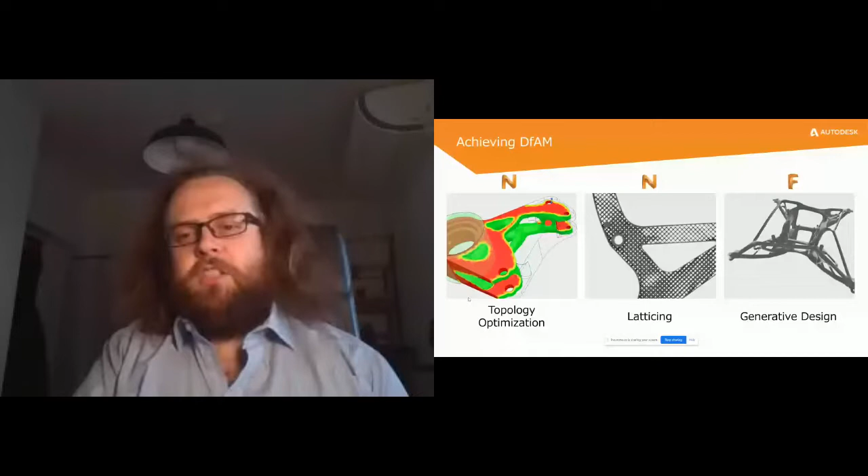How are companies achieving that? Again, from a software and design perspective, you can start from scratch and completely redesign the part, which is a great way to do it. If you're looking at optimizing an existing part, there is topology optimization and latticing. And if you are looking at creating from scratch a new design based on the requirements of that part, looking at generative design is a great way to do that.

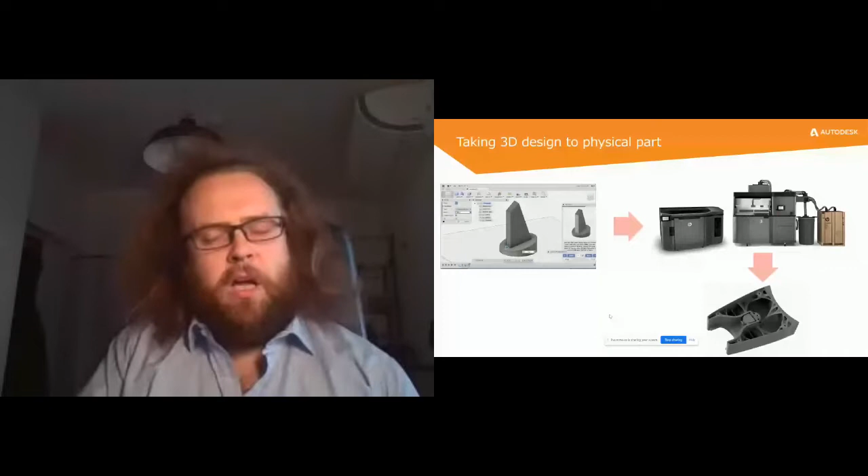In terms of looking at the speed and cost and the repeatability, this is where we're going to have the key focus of the presentation. So I want to jump directly into that. So if we have a look at some of the designs that are going into the parts, people generally think of additive as, I've got the design, I'm going to send it to the machine, and it's going to come out as a functional part as is. If you have used a machine before, if you understand the workflows, you know that it's not that simple. There is a lot of conversion. If you're working with existing STLs, you're going to have to be doing a lot of repair to them.

There's going to be wall thickness checks. There's going to be checking if there's any internal volumes where trapped powder or resin could be, looking at packing to get the optimized ROI out of the machines, looking then further at packing, make sure that the parts are going to be evenly dispersed so that they're not influencing each other.

For example, for an SLS or an HP machine, you'd also be looking at layer densities, and then you'd export to machine. You may have noticed that some of the images in here are using HP logos and using HP machines. That will be quite a large aspect of the presentation, but there is also going to be some examples of how automation can be good for metal as well later on in the presentation.

So if we have a look at what Netfabb does, just so that we can have a base understanding of what the capabilities are here, Netfabb is a workflow processor for taking the CAD to machine. So it's the bridging tool there that will do everything from importing native CAD formats to STLs to 3MF, including slice files. It's going to then allow you to optimize the parts. If you do want to be doing topology optimization or latticing, you can then do further repair of the part.

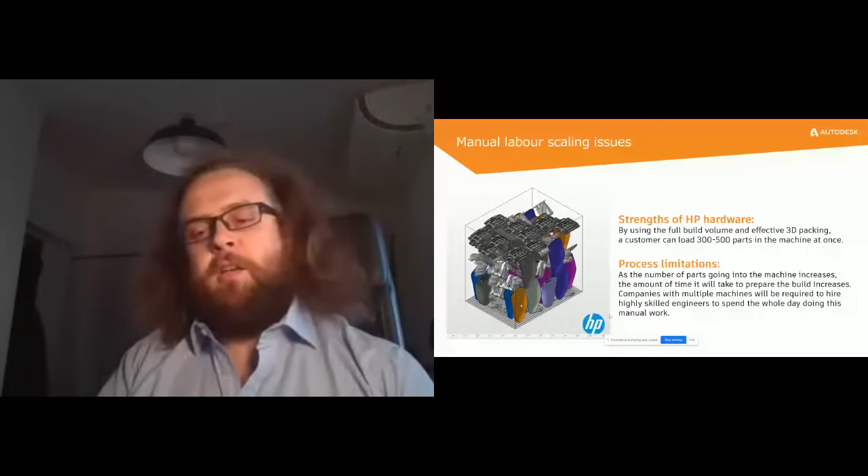But again, because of this process, it means that there is a lot more time in preparing the data. So while the machine can handle a huge range of variety, for the person that's engineering these parts and the person that's then going to be processing these parts to get them ready for the machine, it's going to be a very long process for that person to actually create the pack to go into that machine.

So some of the hurdles that we're seeing for different companies is companies that are looking at doing mass production. They're looking for repeatability, cost, and scale. So again, looking at repeatability, they want to know that the part that they created and tested in one machine is going to come out the same in different machines. They don't want to have a variety of different results coming out of the machines because that would reduce the ability for that part to scale.

If we have a look at some of the costs, again, they want to make sure that the costs that are going into the part are reduced as much as possible to make additive a suitable manufacturing technology for that part, and then hopefully to extend that out to other areas within the business so that they can leverage the technology across other functions within that company.

And then, of course, looking at scale. So if they want to be implementing this on a global standard, for example, like what we heard from Flex, they've got various different facilities across the world. And if they want to have a standardized process, then they definitely need to have a process that is leverageable within each of the different facilities. So that includes making sure that you have a very systematic approach to the way that you're applying different methodologies to the build.

And that is something that's really only going to be achievable if it is not based on individual siloed people. So you can't have the exact same person until we figure out cloning, until we understand the way that that person is working on each of the parts. So if we can have a very logical approach to the way that the parts are prepared, standardize that, and then have that scaled across all of the facilities, then we start to see a real expansion of the additive ability to scale across those different parts as well as regions.

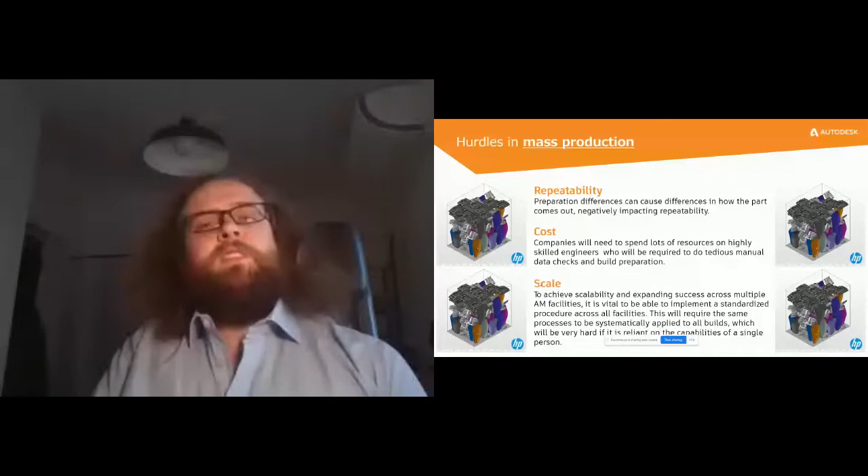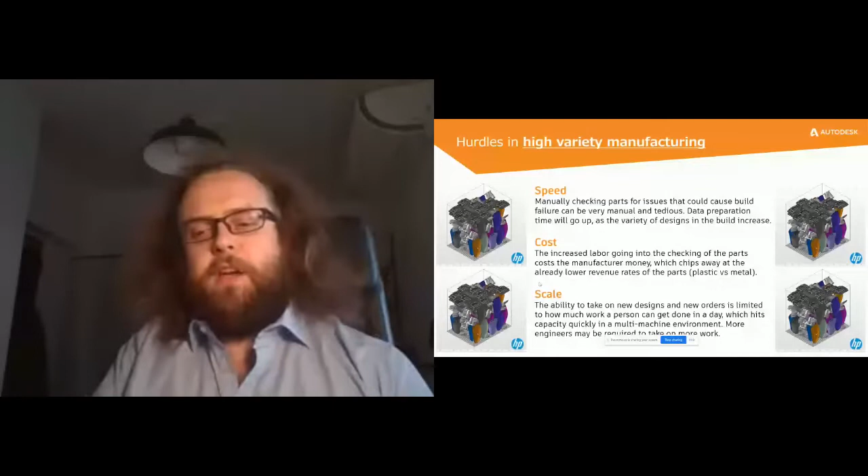So when we are looking at the way that automation can assist with these things, the way that I like to think about it is looking at how you can apply the know-how and best practices, put it into a script, and make it a repeatable process for all of the different machines that you're running across the business. So some of the things that we could look at as a workflow example would be importing an entire folder of parts, doing wall thickness checks, and then saving the parts whether they fail or pass the criteria that you've set up within the wall thickness check,

and then passing on those print files to a 3D packer, which will then prepare that module for you so that you don't really have to do much manual work, especially considering a lot of these processes are very, very tedious. They're doing the same thing multiple times, so it can be a bit of a bore for the engineers that have to do them. So very quickly, just to have a look at a video that's doing this.

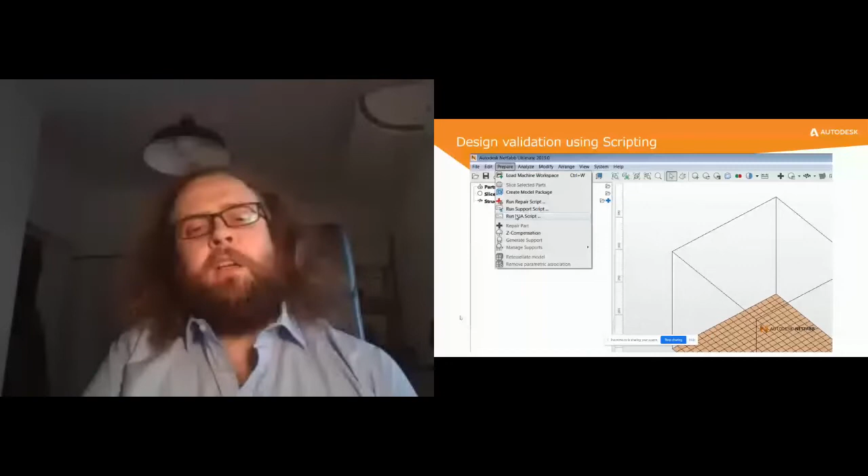So what we're going to be using is the Lua scripting language. So Lua scripting is what we're going to be running here. We're going to be setting it up as a script that's going to be bringing in parts, checking the wall thickness, and separating. So it's going to filter it so that the engineer knows which parts to look at, and this is going to really help them be as optimal with their time.

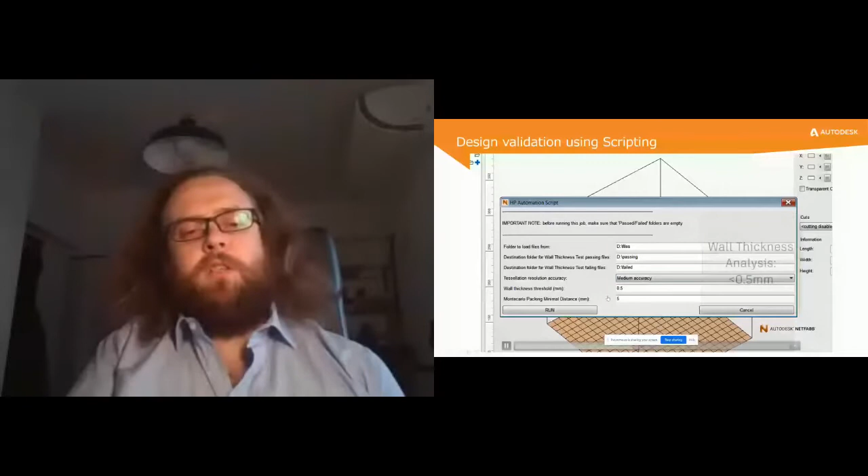So it's a fully customizable script, as you can see there. We've got a pop-up window which can also be customized for separating the parts, doing a tessellation. We've got the wall thickness threshold, and then what we can do is bring all of the parts from that individual folder. So we're going to remove all the parts that are in the failed and pass folders. And then from the files folder, there is one part within this that is going to be causing issues.

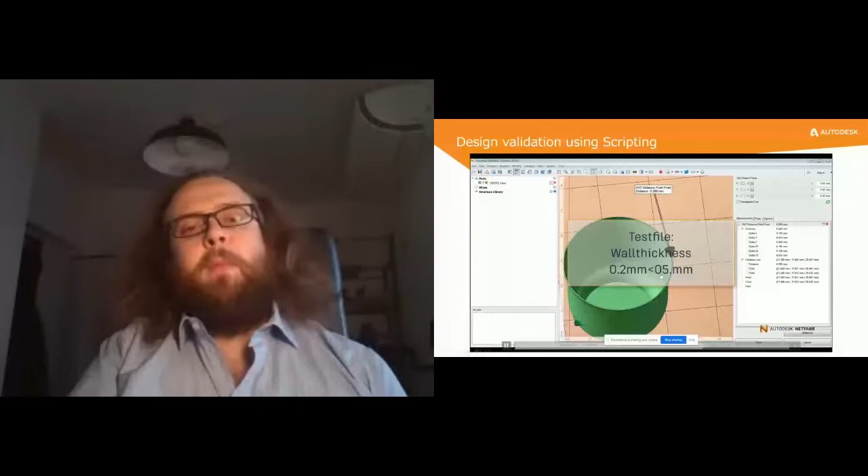As you can see here, we have some parts that are STLs, some that are 3MF formats. We also have some native CAD formats. So it's going to bring in a huge range of different parts into that one build. What it's going to do then is check to see if 0.5 mm is being met. As you can see, this part is 0.2, so it's not going to be meeting the criteria.

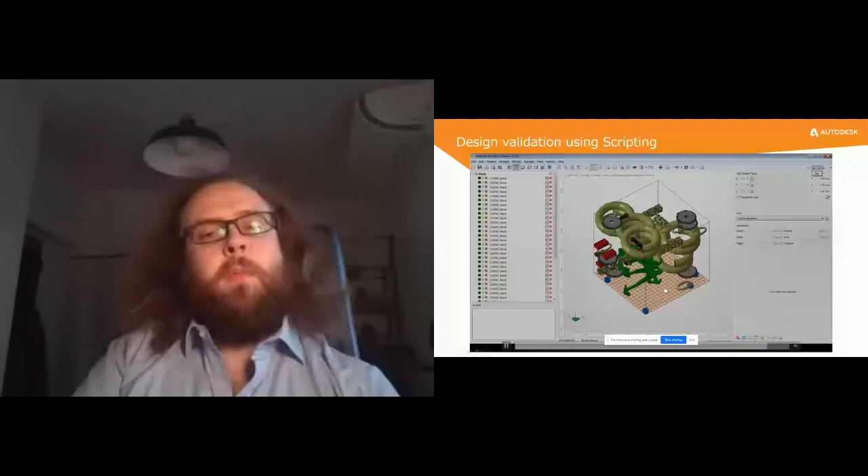When we run this script, it's going to upload all of those parts into the Netfabb environment. It's going to be doing a thickness check. And as you can see, the part that was going to be failing as expected is filtered. So instead of having to check all of these different meshes, I think it was close to 100 parts here, the engineer only needs to look at one part, which really makes them efficient with their workflows.

But when we are having a look at this kind of thing, it is a great tool, and having a look at the Lua scripting is a great capability. You can edit these sort of things here when you are building out that capability and when you do want that flexibility of editing on the flow.

So once you understand that workflow and once you have these parameters set up, what you can then do is set these as presets so that this screen doesn't even come up at all, and it's just going to run that script on all of the parts that you are looking at doing. However, one of the things that we do find is that you do need to go into the software, click Run Script, and then click that script.

Again, it's not a massive amount of work compared to what people would be traditionally doing, but it is one thing that if you were looking at having a 24/7 backend server running where it's going and doing this on an as-need basis, for example, someone loads a bit of data up onto your server, this is going to be a pain because you do need to have that manual intervention.

So what we're looking at doing is we have a very open platform, which we have uploaded to GitHub, so you can actually see all of the information. It's very open. You can adjust it, you can edit it, you can do what you want with it when implementing. It's called Netfabb Application Server. And what it is, it's a RESTful API that is going to connect your service to Netfabb.

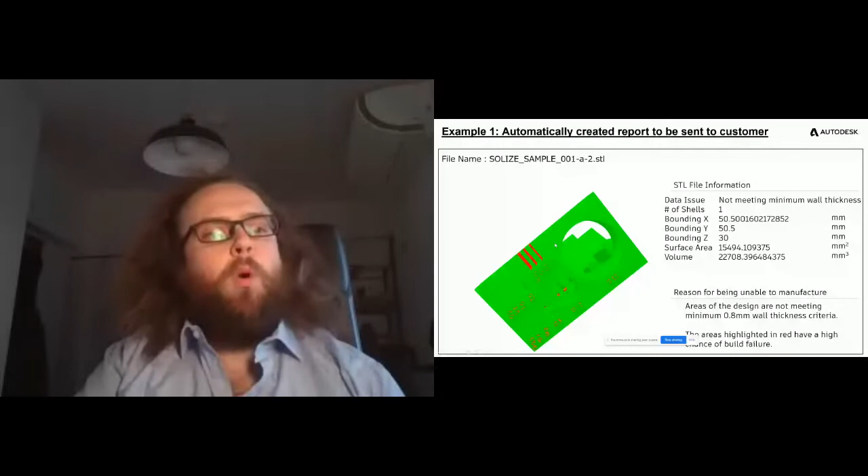So one of our customers in Japan has actually implemented this very effectively. This is an automated report that is created through the scripting for Netfabb. And what this is looking at doing is it's pulling in the STL that a customer has uploaded. It's looking at the individual areas within this part, critiquing it. It's checking, for example, in this case, they've got a minimum wall thickness criteria of 0.8 mm.

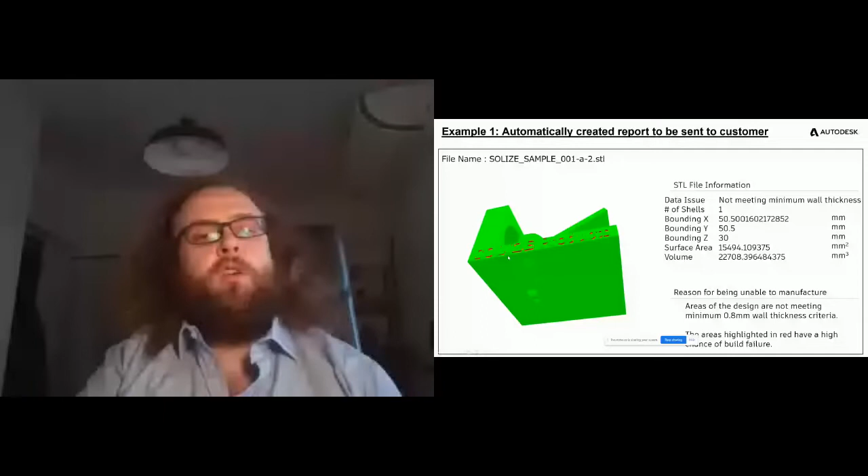And as you can see, it's actually automatically created this, which is a 3MF file format. It has highlighted all of the areas that are not meeting the criteria of 0.8 mm minimum wall thickness, and it has applied a red surface to each of the areas that has issues. What it can then do is it's also pulling all of the information about that STL.

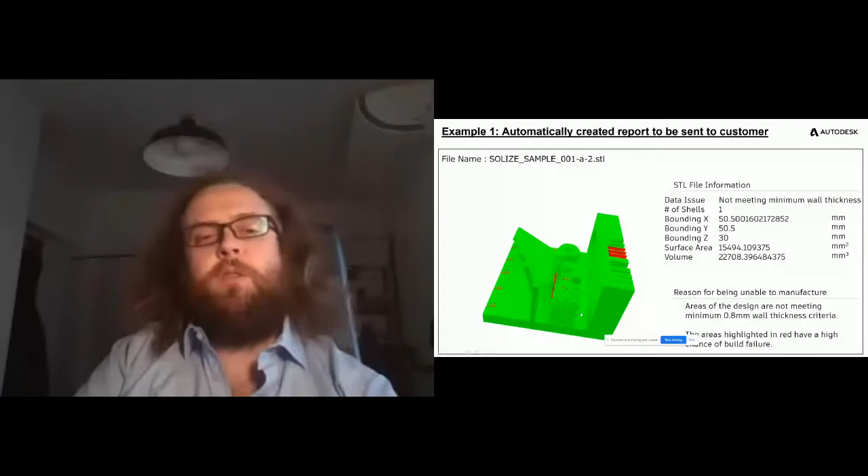It has all of the information that can then be sent back to the customer, and it's saying, is this going to be acceptable? Do you understand these risks that some of these areas might be damaged during the build? So that helps to reduce the risk of that manufacturer producing this part and having failure. If there are areas that can be automatically fixed, they will be automatically fixed. But again, that comes down to the way that the script is customized.

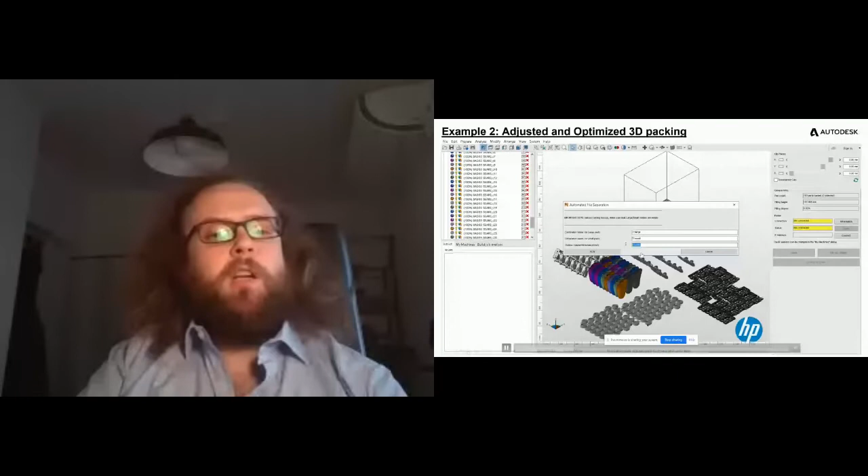Some of the other things that we can have a look at is, for example, a build prep packing that is based on adjusted setup exactly for the way that you guys want it done. And that can all be done within this Lua script as well. So what we're going to be looking at doing here is you can set up an area of the build tray for very large parts.

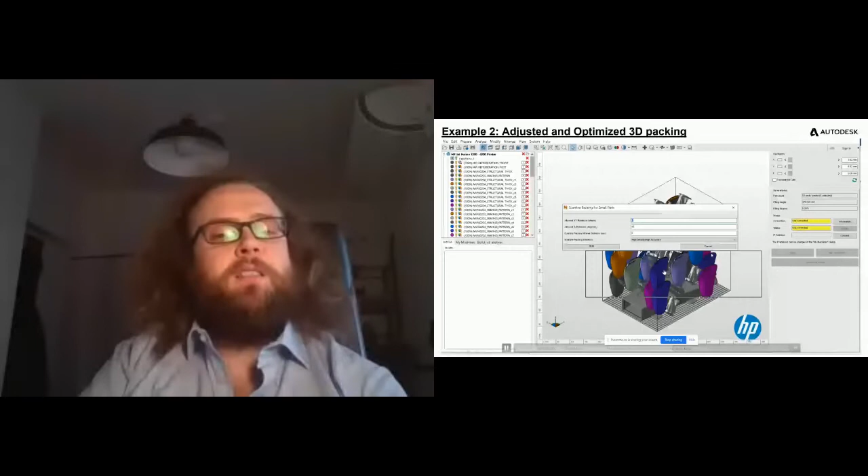This really helps to reduce the distortion of the large parts if you put them in the center and at the base. Based on that, once you have those parts locked in, it's going to fill it with medium-sized parts. And then once you have those medium-sized parts locked in, it's then going to bring in the small parts. So as you can see, all of these parts in there, it's then doing a complex calculation for the smaller parts. It's got the information about the build density.

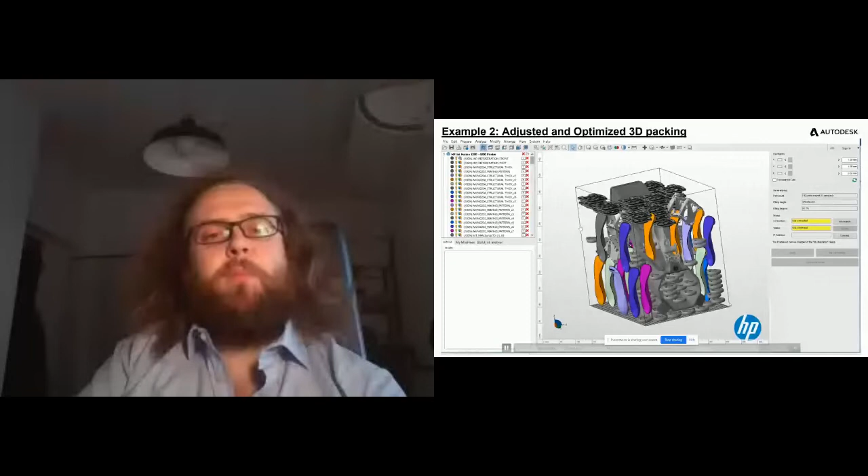And one of the things that I quite like about this is that you can actually set up and change and adjust all of the information about the way that this is done based on the parts that you're making, the know-how that you guys have, and you're not relying on software providers to provide you the best solution. Of course, we do have a very, very great setup in terms of automatic packing capabilities, but if you did want to adjust it, or if you're creating a new machine and you want to be building out best practices, this is a great way to actually identify and create these methods.

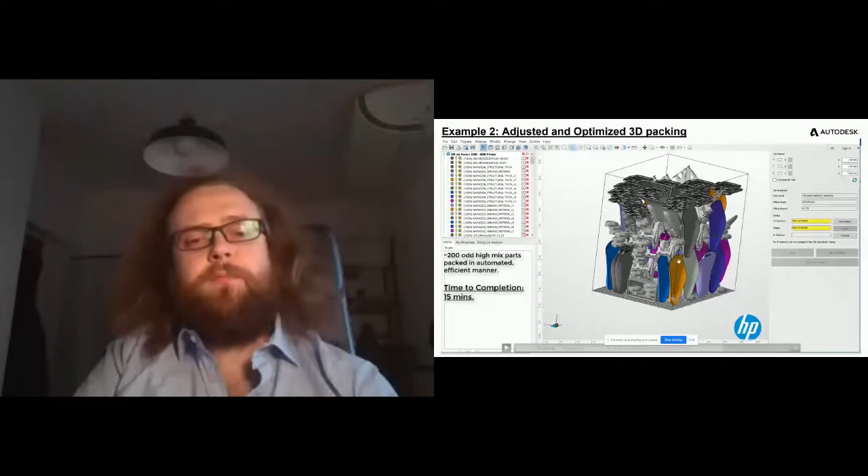We've been talking about plastics mostly until now, but one of the things that we are seeing quite a growing interest in, in terms of metal, is looking at orientation and support optimization. And what we're going to be doing with this script is taking in this part, applying various different orientations, applying various different support strategies, simulating it so that we can then see which is going to be the most effective way of us making that part.

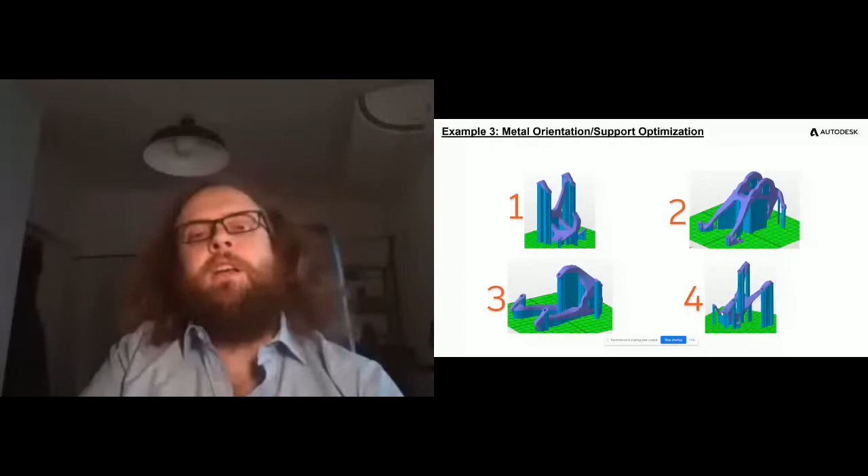So one of the things that I always like to do with people when we do have this conversation is to look at, these are the 4 different orientations. Which one would you decide if you were running a machine? It is a trick question because there is no such thing as an answer that meets every single criteria. But when we have a look at the workflow, I want to just show you and focus on the way that Lua is being leveraged to set this up.

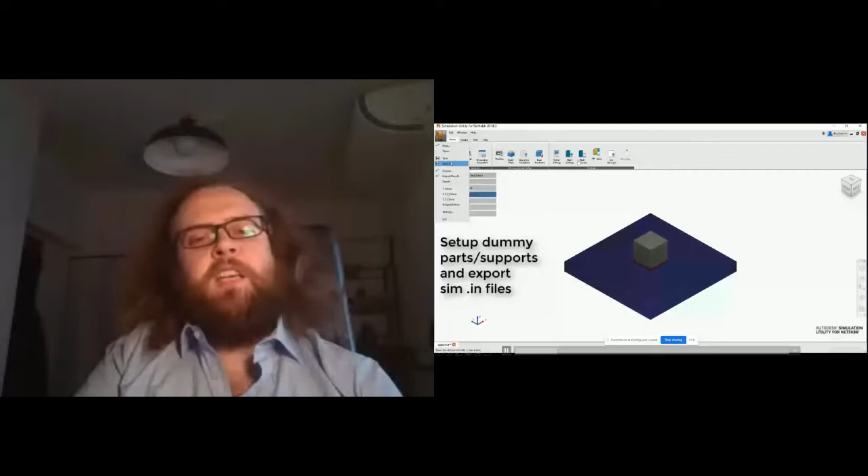So what we do is within the simulation, we have the preparation that goes on in terms of creating the build plate, setting all of the information about how the build is going to be running, and it's going to create these input files. We have the input files in terms of how that build is going to happen. We just need to bring in the 3MF format of the part and the supports.

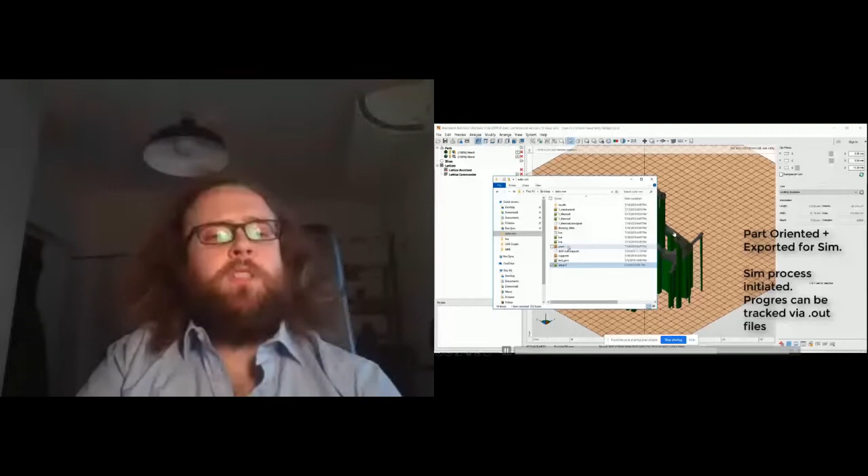So based on this, what we're going to do is we're going to repair that part. We're going to do orientation. We're going to do support generation based on scripts that have already been pre-set up. And then we're going to export that to simulation for automatic simulation knock-on processes. So this process has taken 23 seconds for us to do that. We've got this output file, which is going to be the orientation and supports, as you can see here. And then that is going to have an out file, which is the simulated results file.

Then open up, manually look at how the distortion is happening, how the residual stresses are building up, and whether that orientation and support method is going to be suitable for the build. So if we have a look, again, we have 1, 2, 3, 4, and taking the guesswork out of it, we can actually see what that looks like in terms of distortion on that build orientation.

But then we can also take it so that we have a look at how many parts can fit into that build. How much support volume are we having? What is the build time? So we can have a really, really educated and scientific approach to the way that these parts are going to be prepared.

Jumping into what it looks like in terms of ROI, we are running short on time, so before one of the team jumps in and lets me know that, I wanted to address that. But if we are looking at the speed and the costings of this, again, automation is a great way to keep it relatively flat in terms of taking on new orders without having too much cost integrated with that preparation. So if we have a look, this is the manual preparation.

Of course, you don't have the overheads of the software, which are going to be a little bit higher than if you were doing it on a one-part basis with an individual engineer. But as you see, the cost of preparing more parts hits a threshold. You're going to have to do a new hire. You're going to have to then go and do the manual processing there as well. So there are a lot of knock-on effects of having a manual process.

The other thing is, once you've hired that second person, once you reach that 2-person threshold and you're looking at getting a new machine, you might hit the point where you've actually hit capacity and you can't take on new projects. This is, of course, going to be a challenge. So automation really helps to take out that requirement. If we have a look at the amount of parts that an individual can take on with automation, it definitely improves. So I definitely think that there is a lot of value here.

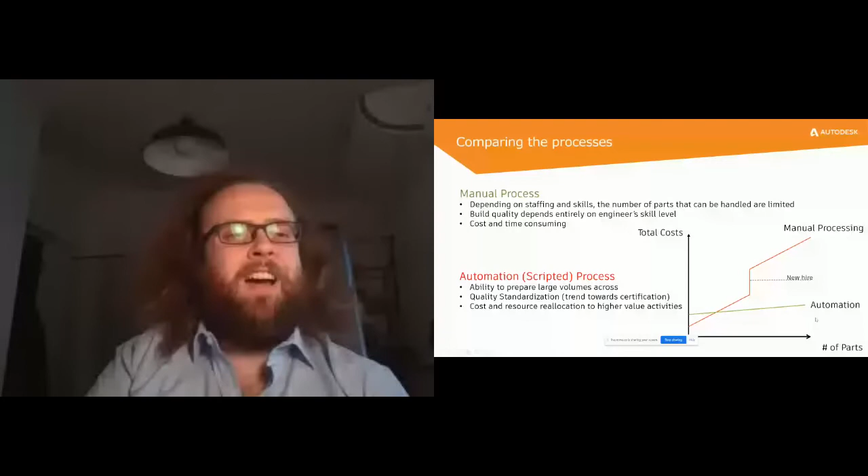If we start to look a little bit more complexly at the ROI calculations, again, I don't want to go into this in too much detail, but there is a bit more explanation in here. If we have a look at, for example, a service bureau that has on average 100 parts coming through per day, and even though all of the parts aren't going to be completely unique, on average they would look at about 6 minutes per part to prepare. If their engineers are paid $60,000 or $30 per working hour, we would look at the calculation below.

The overall ROI in this situation for somebody implementing this would be around $55,000 in savings, or around 275% ROI, based on a very, very rough estimation of $20,000 in software and servicing for a license that would allow them to achieve this.

Of course, that is one example, but if we have a look at the constraints of part number, for example, 100 parts, wages being $30 per hour, how fast would they need to be in order to break even? And again, if it takes them more than 3 minutes, they're going to be hitting ROI very quickly. But the other thing is, this is based on 100 parts; at 200, 300 parts, you're starting to see even more ROI derived from that automation.

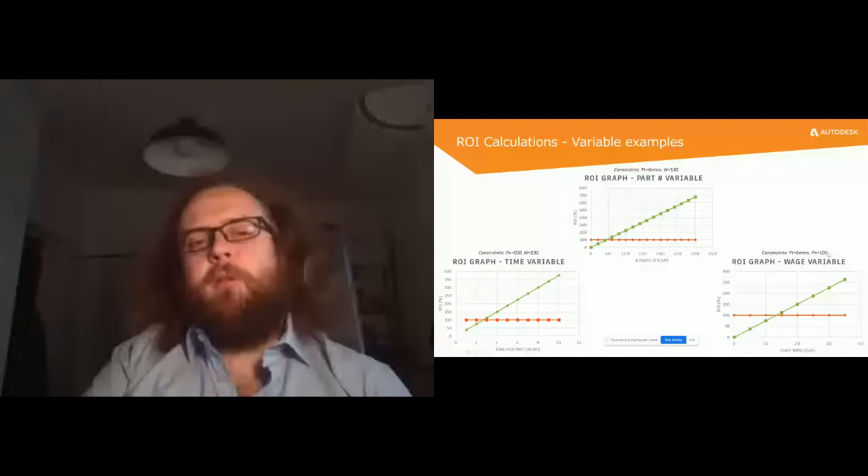Then looking at part variables, if you have, for example, a constant 6 minutes per part and wages are steady, the amount of parts that you would need to hit ROI is about 60. And based on wages, depending on where you have facilities, the wages might be quite different. Setting it at 0, just in case we have some education facilities that are teaching their students and can get away with cheaper labor, the wage based on 6-minute preparation and 100 parts hits parity at less than $15. So again, basic ROI calculations are very achievable with this.

But the thing that we need to know, not just about direct ROI, there is also a lot of non-direct ROI that allows people to get knock-on benefits. Not going to go over all of these, but some of them are standardization of processes, which really helps with a very large topic that we've been discussing over the last few hours, which is certification. Reduced costs, which can hopefully be passed on to customers, which can then allow for increased demand of parts, which allows further investment in machines and hopefully allows companies to actually start a bit more seriously.

Some of the other ones: easier to further scale businesses, and faster and easier onboarding of new staff is a massive one that we're seeing as a very surprising non-direct ROI, because the standardization is already done.

They very much have a process where they don't really need to understand all of the specifics, but they can still leverage this tool. The other thing that's somewhat interesting is that the amount of time spent on labor-intensive, very tedious tasks is highly reduced, which means the work environment improves and staff retention goes up. A happy workforce is something I think everyone's trying to achieve, and if we can reduce the number of times they're going in and measuring walls, then that's great.

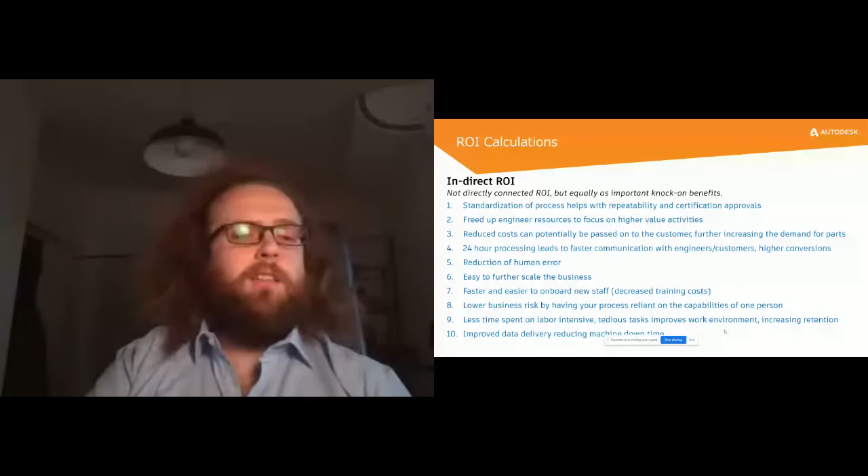So again, I'm not going to go over all of these. I would prefer to jump into some of the Q&A if we have any. So I would like to wrap it up there, but I will leave this up on the screen so that people can read through it as we go through the Q&A.

Okay. Hello, Peter. I'm back. Thank you very much for this interesting presentation. I actually do have some questions for you.

The first one, the most voted one, is: does the scripting need to be done from scratch, or does the software record a macro that can be used as a script to change the variables? Yeah, absolutely. The script has various different tools and various example scripts, so you can actually go in. There is a very large range of functionality that can be done within the example scripts.

If you are looking at creating something a little more intense, for example connecting with your individual servers or with CRMs, that is very much a workflow, so that can be somewhat challenging.

Luckily, for those already using LINK3D, we do have integration with LINK3D, which was presented earlier in the marathon. So you can already have quite a lot of this done, and the ability to use the scripts to feed back into LINK3D is something we are working on further. So there is current, existing, easy-to-access functionality, and the flexibility to expand that out is something we have seen a lot of success with.

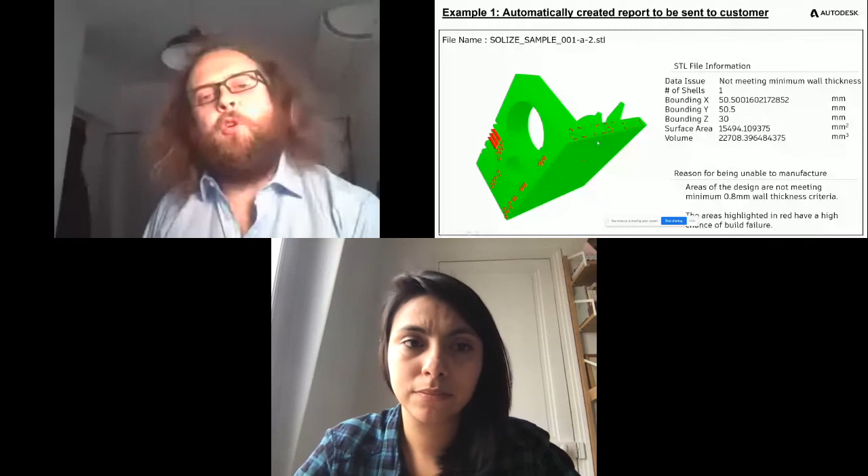It's an incredibly flexible file format. It captures a lot of metadata, and it's very intuitive in the way it can be integrated with different systems. As you saw, 3MF is already integrated with Microsoft. It's being pushed by a lot of other software, so it's not just an additive format but a 3D visualization tool that can be used with Adobe and Microsoft. It's the key file format we're seeing a lot of success with.

Anything that's full color should be 3MF; if it's not, it's being inefficient. Anything looking at multi-material and having metadata around the material going into each section of the design should be 3MF. As a rule of thumb, anywhere we can avoid STL and go with 3MF, we do. It also helps reduce file size, which is massive when working with very complex geometries as well as lattices. So if you haven't had a chance to play with 3MF, check it out.